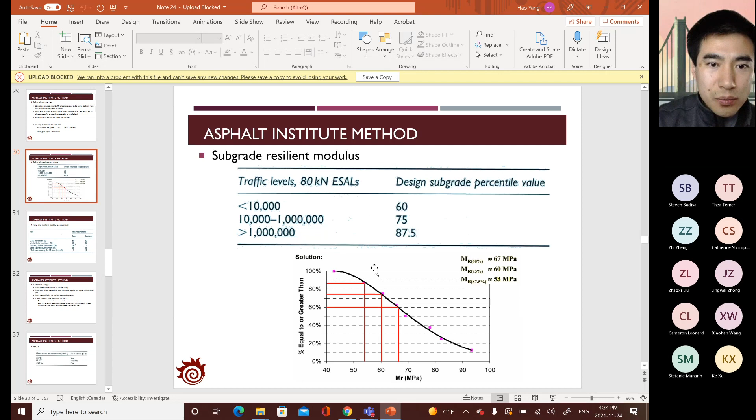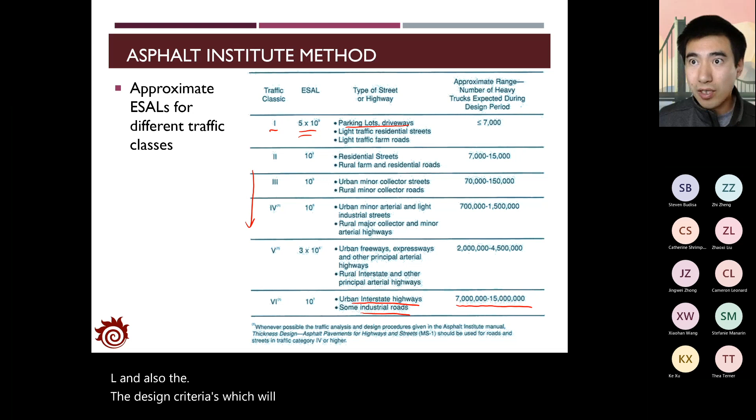With that, I will start lecture today. In the last lecture, we introduced some basic ideas about the AI method. We will go through some fundamental variables we need to use for the AI method, including the estimation of the ESAL, and also the design criteria, which will include fatigue cracking and permanent deformation. Both of these will be applied for us to select the thickness or estimate the thickness for the pavement layers.

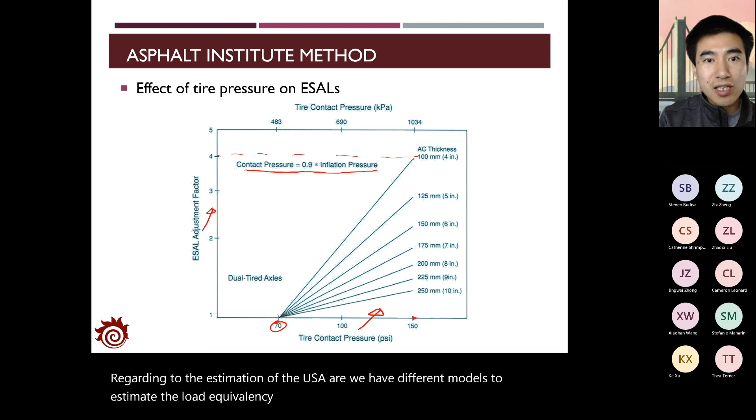Regarding the estimation of the ESAL, we have different models to estimate the load equivalency factor. And if you have the ESAL with different values about the tire pressures, you probably need to do some corrections or adjustments to make sure they fit the standard ESAL values. That's what we introduced in the last lecture.

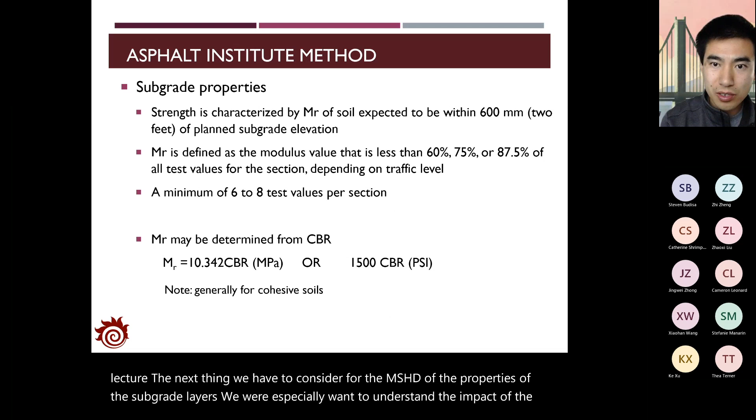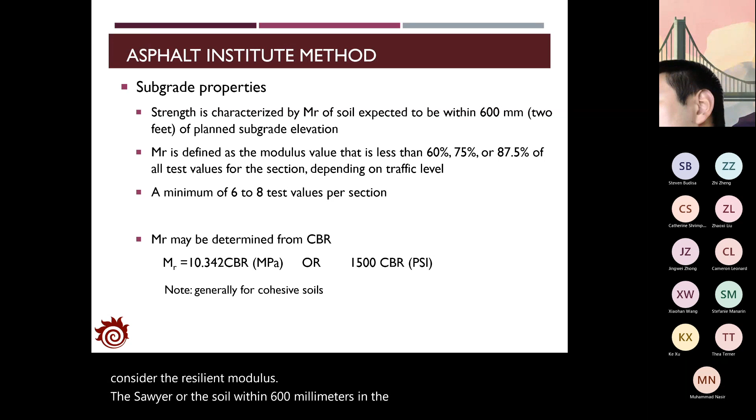The next thing we have to consider for the AI method is the properties of the subgrade layers. We especially want to understand the impact of the resilient modulus of the subgrade on the performance or design of the flexible pavement. Usually we consider the resilient modulus of the subgrade soil within 600 millimeters in the design area, and these are some typical values we're going to use, from empirical analysis.

The resilient modulus is usually defined as the value under certain percentiles. The typical values would be 60%, 75%, and 87.5%. We're going to need to use different percentiles depending on the traffic conditions we have to consider.

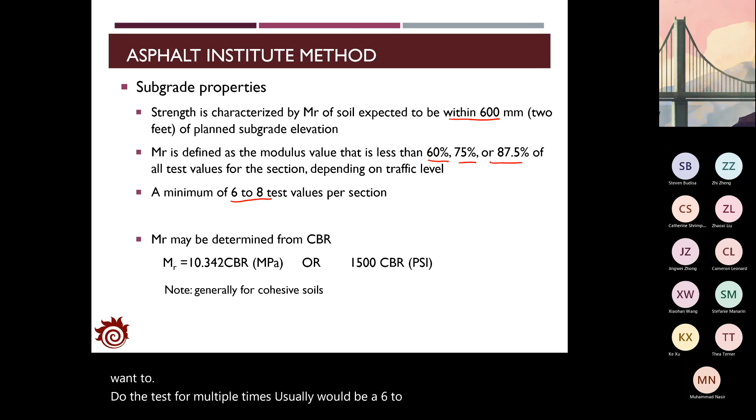Usually to get the resilient modulus, as you know, in reality the resilient modulus for the subgrade soil is not a constant. It's actually changing at different locations with different materials in the pavement. So what we do is conduct the test multiple times, usually 6 to 8 tests for each section, and then we will have 6 to 8 values about the resilient modulus, giving us the distribution about the resilient modulus.

Also, if you don't conduct the MR test, instead you do the CBR test, you can use the empirical relationship between the MR and the CBR to estimate the MR values. So this is what we introduced in the previous lectures about the soil properties.

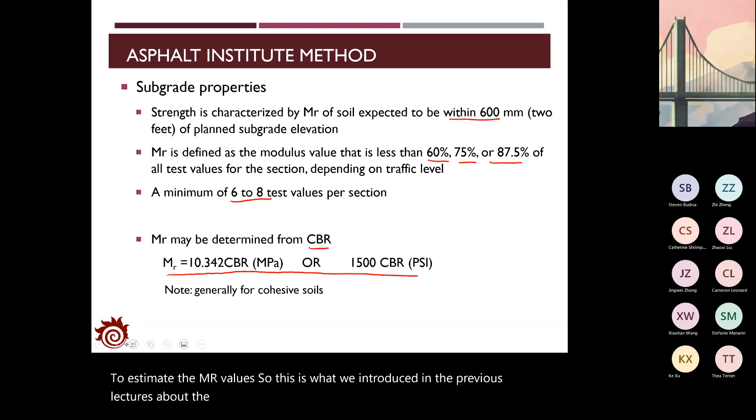Now I'll give you some hints about how to find the values of the resilient modulus for the design of the flexible pavement with the AI method. First, we have to find out what percentage we need to use. Usually, depending on the traffic levels, if the ESAL is below 10,000, we consider the 60th percentile. If it's between 10,000 and 1 million, a very large range, we use the 75th percentile. And if it's higher than 1 million, we have to choose the 87.5th percentile.

The figure below shows the distributions of the resilient modulus and their different values. You can actually see that with a higher percentile on the vertical axis, it corresponds to a higher percentage.

The resilient modulus will be smaller, which means that if you have the higher ESAL, you will assume that the resilient modulus of the subgrade would be smaller, and in that sense you need to design larger thickness for the pavement layers. So that's the basic idea.

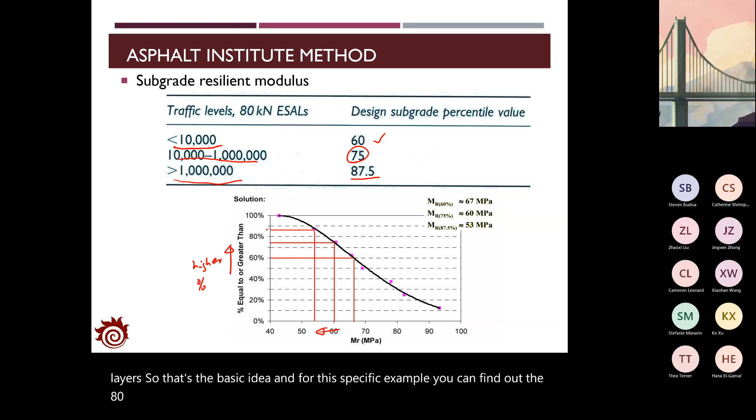For this specific example, you can find out the 87.5 percentile with the value around 53 megapascal. For 75 percentile, that will be around 60 megapascal, and for the 60 percentile, it's 67 megapascal. So that's from one distribution.

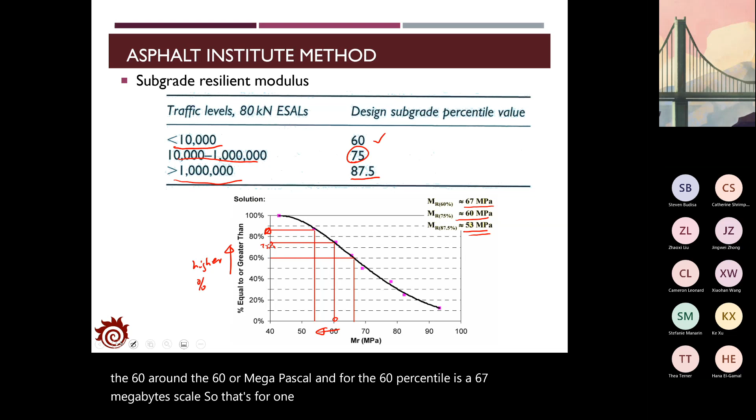As I mentioned previously, if you haven't done the MR test, you can conduct the CBR test to find out the CBR values of all the subgrade soils. Do multiple tests. This is what we can do in the field based on the CBR test, the liquid limit test, and Atterberg limit test and so on.

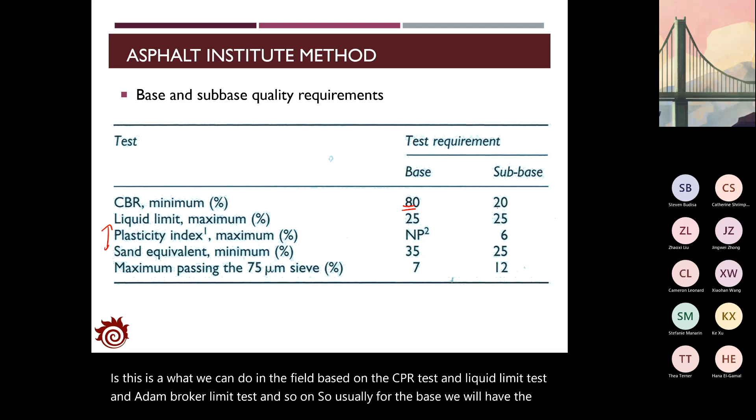So usually for the base, we will have the CBR around 80%, for the subgrade around 20%, the subbase around 20%. So those will be some typical values. And then what we will do is use all this information to design the thickness of the pavement layer based on the AI methods.

For the thickness design, we will need to think about 3 parameters. The first one is the mean annual air temperature. This one is applied to determine whether there's any freeze and frost effect to the pavement.

The second one is the resilient modulus. As I explained previously, you need to determine the distribution of the resilient modulus in the subgrade of the pavement, and then find the correct percentage. And the third one is the ESAL, which would be the traffic load.

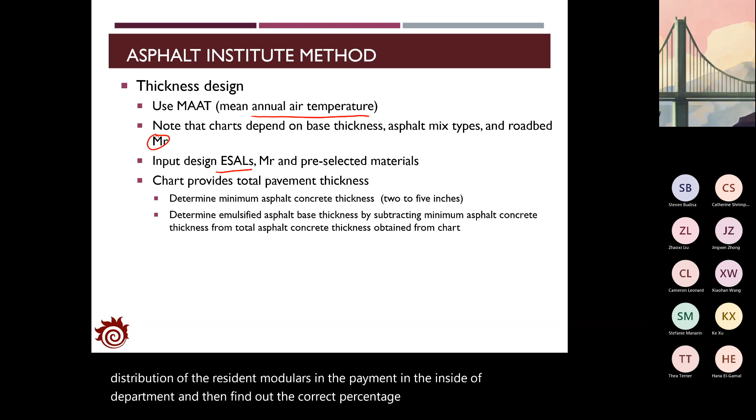So those would be the 3 major variables you need to think about for the thickness design. Once you have determined these values, you can then go to select the chart. There will be some empirical charts from the AI method to determine the thickness of the pavement structures.

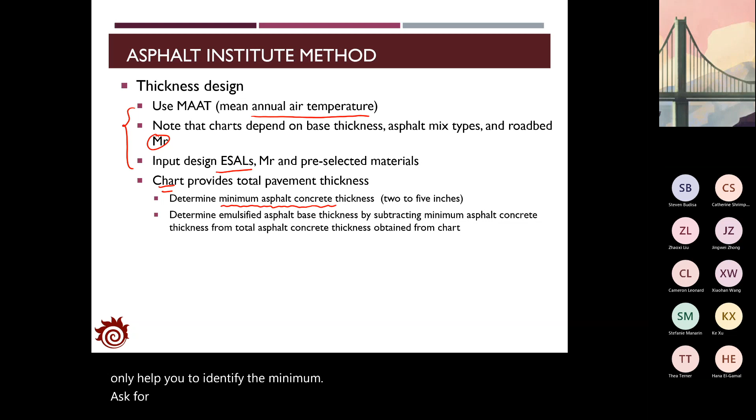So those charts will only help you identify the minimum asphalt concrete thickness. Usually that will be around 2 to 5 inches, depending on the structures of the flexible pavement and also the properties of the subgrade and the traffic load.

It's also able to determine the emulsified asphalt base thickness by subtracting the minimum asphalt concrete thickness from the total asphalt concrete thickness.

So usually what you would observe is like for the flexible pavement, with the AI method, you're gonna just see. So you will have the base layer. Base layer is some particles or crushed stones that are going to be applied above the subgrade.

The AI method, those charts provided by the AI method, will only help you determine the thickness of the asphalt surface layer and the emulsified asphalt concrete layer. So the AI method will only tell you the total thickness of these two layers.

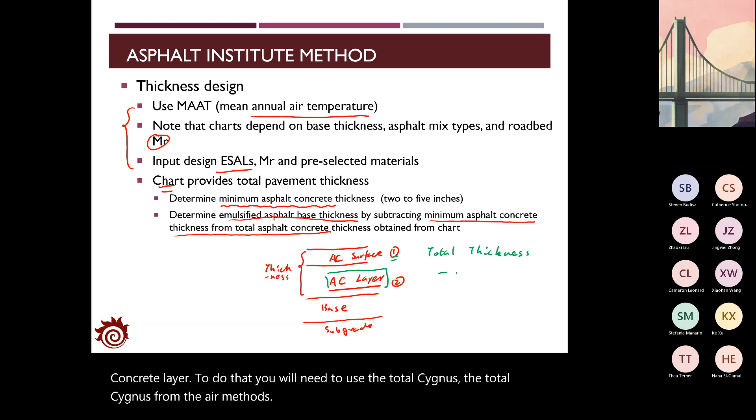Layer 1 and layer 2, both of them are asphalt layers. You also need to determine the emulsified asphalt concrete layer. To do that, you will need to use the total thickness from the AI method minus the minimum thickness of the asphalt surface layer. So that's what you do to find out the thickness of these two layers.

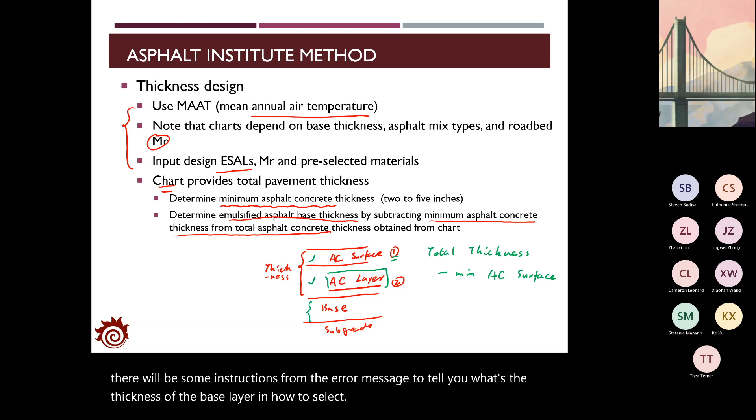And also there will be some instructions from the AI method to tell you what's the thickness of the base layer you have to select. So that's the overall idea from the AI method.

For now, I will give you some more information about these three variables that we're going to use in the AI method. The first one is the mean annual air temperature, MAAT. It depends on the values, and we will categorize the situation into three freeze frost effects.

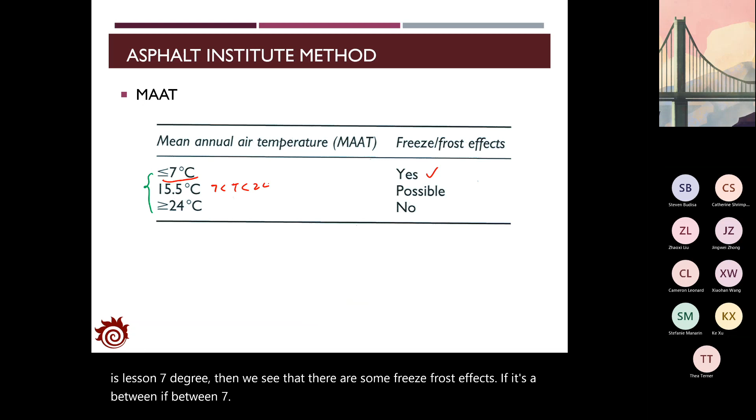If the mean annual air temperature is less than 7 degrees, then we see that there are some freeze frost effects. If it's between 7 and 24 degrees, we see that there are some possible freeze frost effects. If it's higher than 24 degrees, it means that there's no freeze and frost effect. So those would be three different categories you need to specify.

Then based on the freeze frost effect conditions, we will need to choose the right chart from the AI method to determine the thickness. So that's the first variable, the mean annual air temperature.

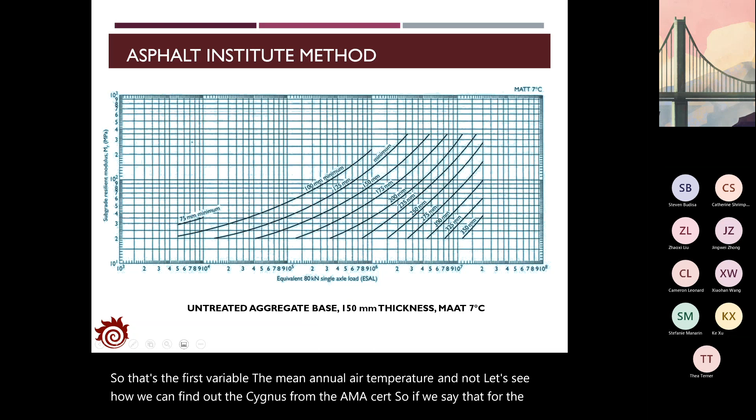Now let's see how we can find out the thickness from the AI method. So if we say that for the case with the freeze frost effect, which means that the MAAT is less than or equal to 7 degrees, in that sense we have three situations. The first one is applied for the deep strength pavement.

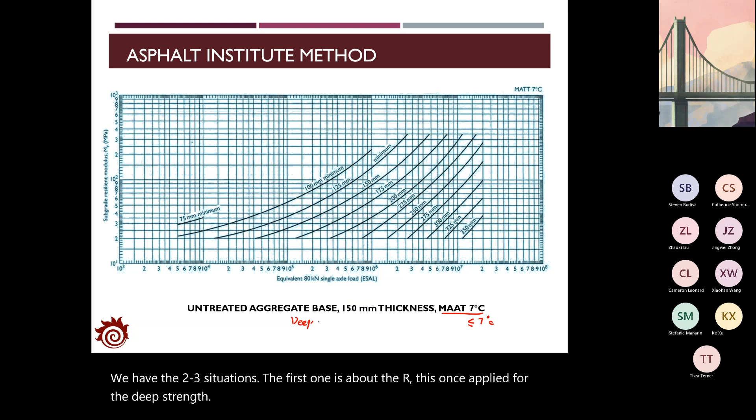If you can still recall the deep strength pavement, you can see that it will include 3 layers. The first one is the asphalt surface layer. The second one is the asphalt base layer. And the third one is the granular subbase layer, granular base layer. And then it has the subgrade, with all layers placed on the subgrade.

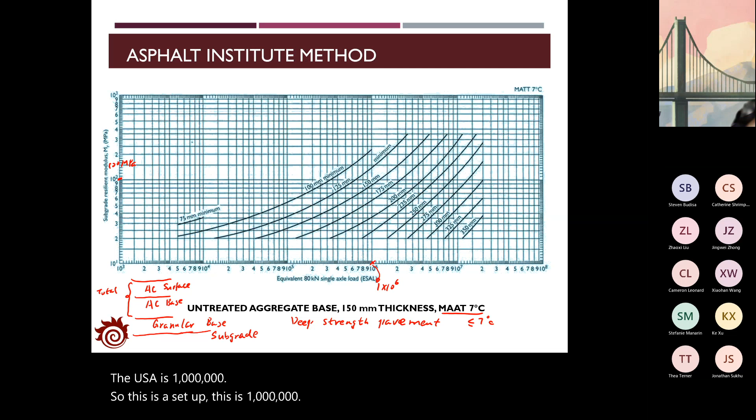So the thickness from this chart will tell you the total thickness of both asphalt layers. What you're going to do is identify the percentile of the MR. Say the MR value you defined is 100 megapascal, and the ESAL is 1 million. Then you can identify the thickness by finding the intersection of these two points.

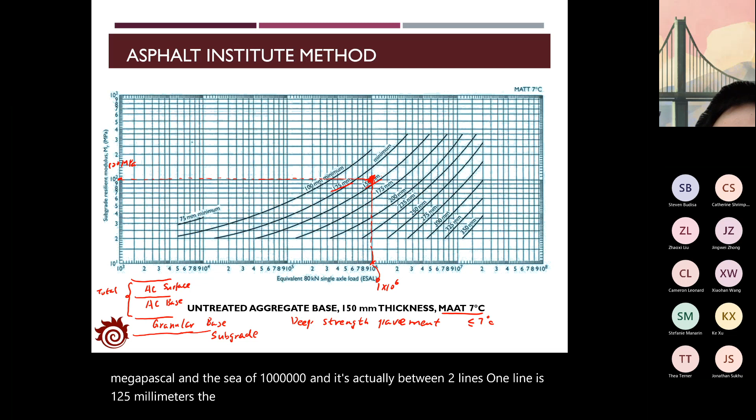Based on these two lines, you can find this point would be the point with the MR value of 100 megapascal and the ESAL of 1 million. It's actually between two lines: one is 125 millimeters, the other is 150 millimeters. So you can use linear interpolation to find the value at this point, which is probably around 140 millimeters.

So this 140 will be the total thickness of both asphalt layers, for the deep strength pavement. This chart is only applied for the deep strength pavement with the thickness of the granular base of 150 millimeters. So this is the first chart.

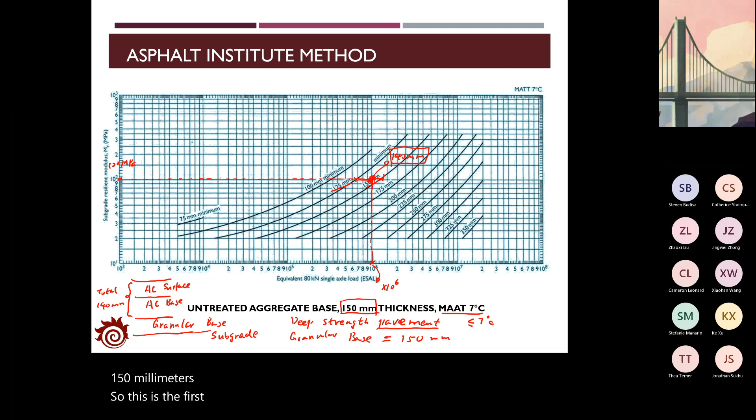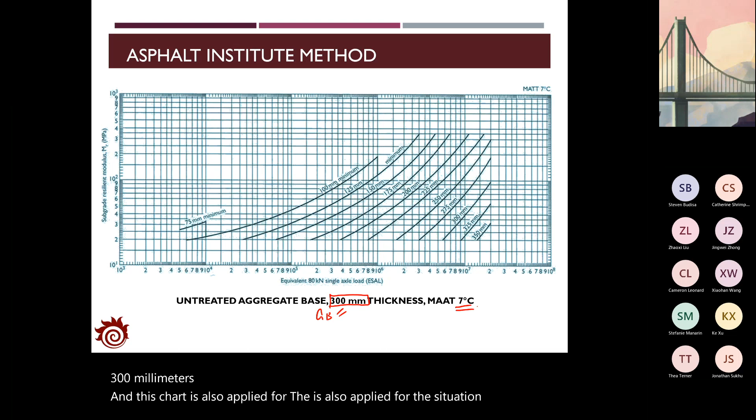We also have another situation. The AI method provided another chart which applies for the granular base with thickness around 300 millimeters, and this chart also applies for the situation with freeze and frost effect, so the MAAT temperature is less than 7 degrees.

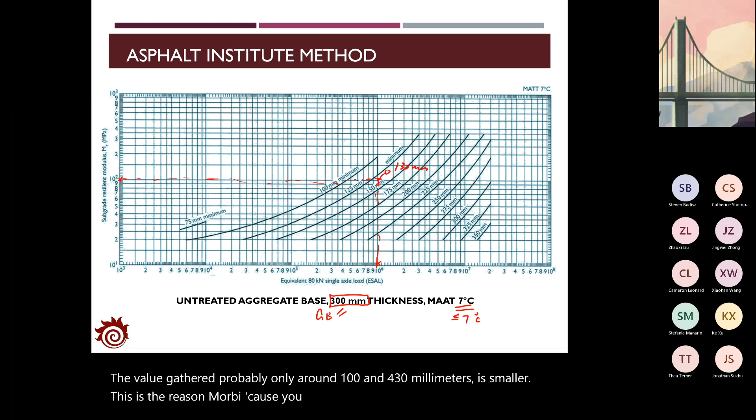If we take the same example, MR is 100 and ESAL is 1 million, you'll find the value you get is probably only around 130 millimeters. It's smaller, which is reasonable because the granular base thickness is larger, meaning you have stronger support from the lower layers, so for the asphalt layers you don't need very large thickness.

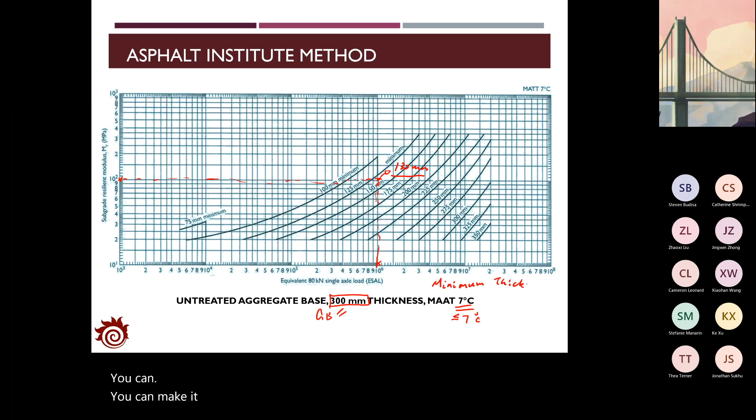Again, I should mention that all these thickness values you calculate here are the minimum thickness. In your design you can make it larger depending on the specific requirement of the project. So that's for the deep strength pavement.

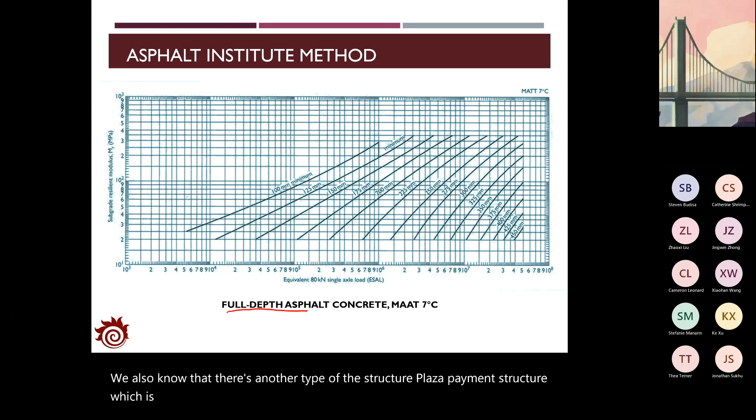We also know there's another type of flexible pavement structure called the full depth structure. In the full depth structure, we will not have any granular base layer. Instead, we only have two layers: the asphalt surface layer and the asphalt concrete base layer, placed directly on top of the subgrade. This is called the full depth flexible pavement.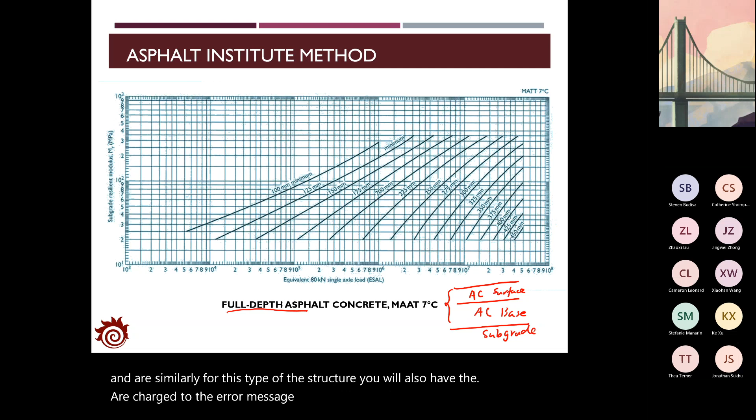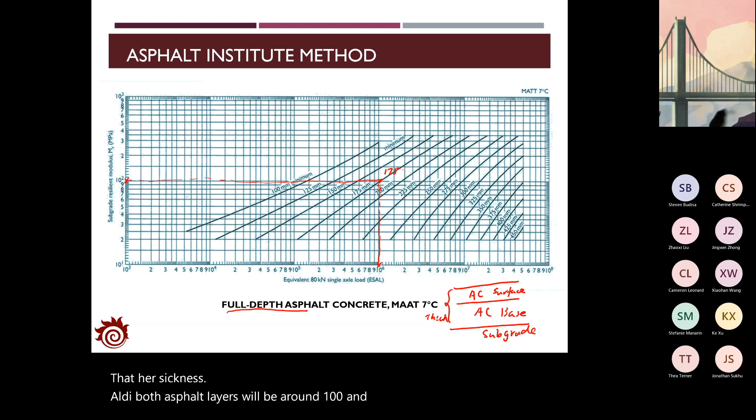For this type of structure, you will also have a chart. The AI method provides a chart to determine the thickness of both asphalt layers. Taking the same example, ESAL of 1 million and MR of 100, you can find the total thickness of both asphalt layers will be around 175 millimeters, which is larger than the two deep strength pavement cases.

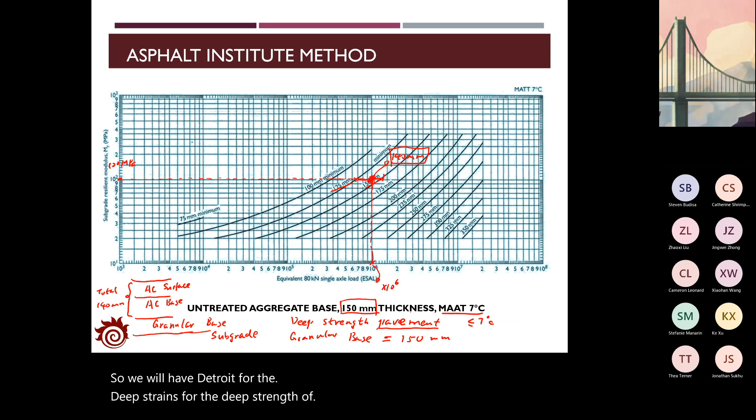So that's for the design of the flexible pavement with average annual air temperature less than 7 degrees. We have the chart for the deep strength pavement with granular base thickness of 150 millimeters, and another chart for granular base thickness around 300 millimeters.

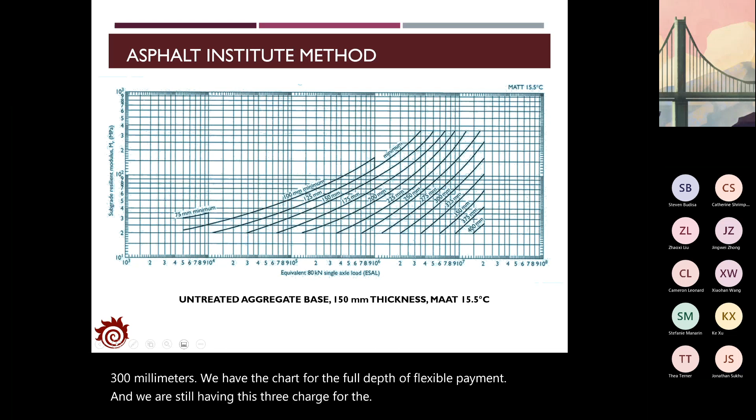We have the chart for the full depth flexible pavement, and we also have three charts for the situation with possible freeze frost effect, with MAAT around 15.5 degrees, indicating the temperature is between 7 and 24 degrees. It's the same approach.

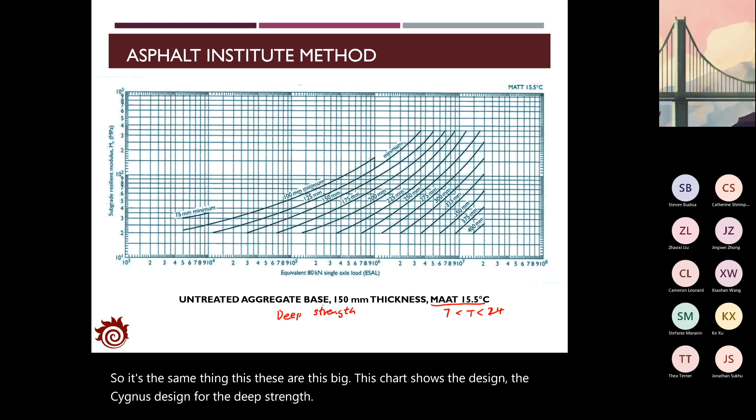This chart shows the thickness design for the deep strength pavement with the granular base of 150 millimeters, and this chart shows the deep strength pavement with granular base around 300 millimeters, with a possible freeze frost effect. We also have charts showing the thickness for the full depth flexible pavement.

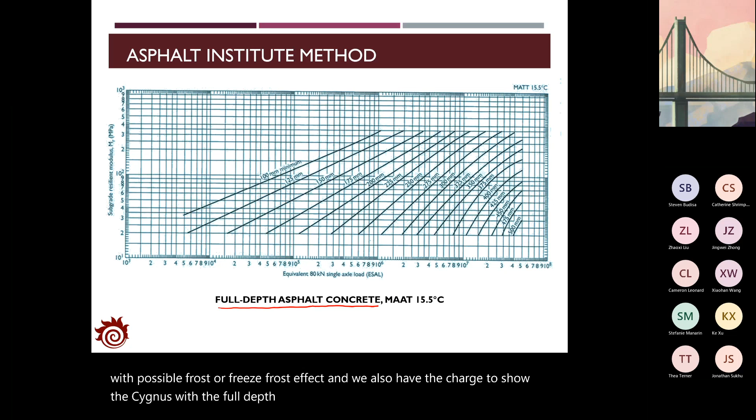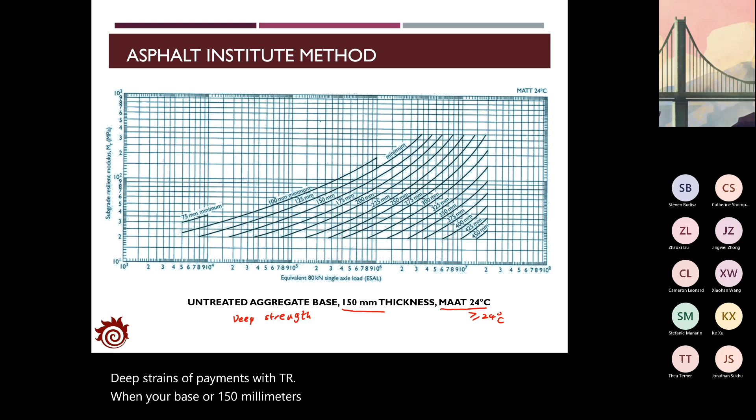That's for the second case with possible freeze frost effect. For the third situation without any freeze frost effect, meaning the temperature is higher than 24 degrees, we also have three charts. The first one is for the deep strength pavement with granular base of 150 millimeters. Similarly, you can use the MR values and the ESAL to find the thickness of the asphalt layers.

The second one shows the deep strength structure with the 300 millimeter granular base, and the last one shows the full depth asphalt pavement without any freeze frost effect.

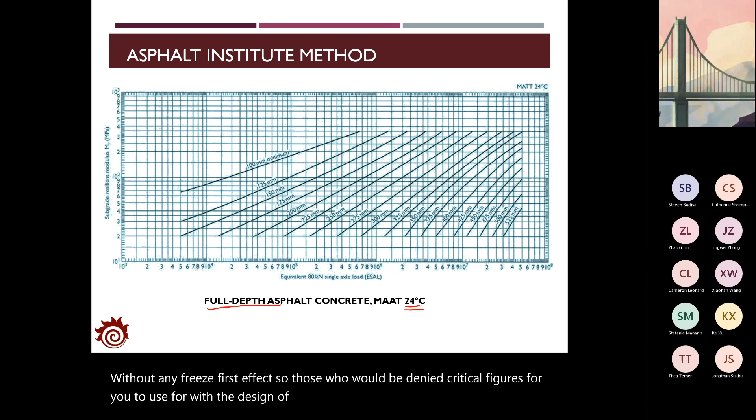So those would be the 9 critical figures for you to use with the design of the AI method, and there will also be some typical recommendations from the thickness design in the AI method.

First, we will always place a minimum of 150 millimeters base course, the granular base course, over the low quality subbase, especially when the quality of the subgrade is very poor, then you should place a 150 millimeter granular base layer there.

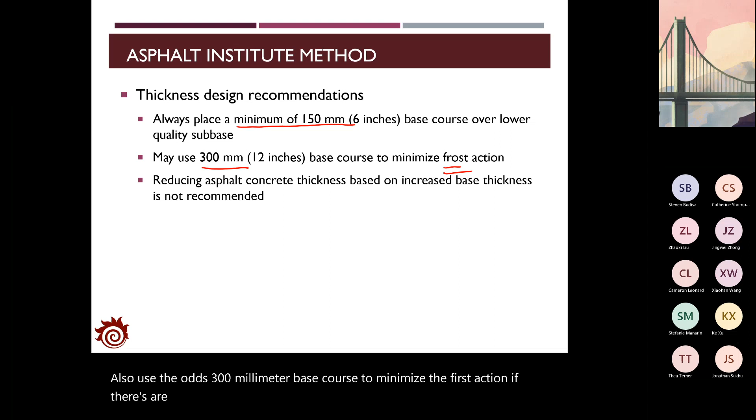You can also use the 300 millimeter base course to minimize frost action. If there's a severe frost action, you should apply a 300 millimeter granular base.

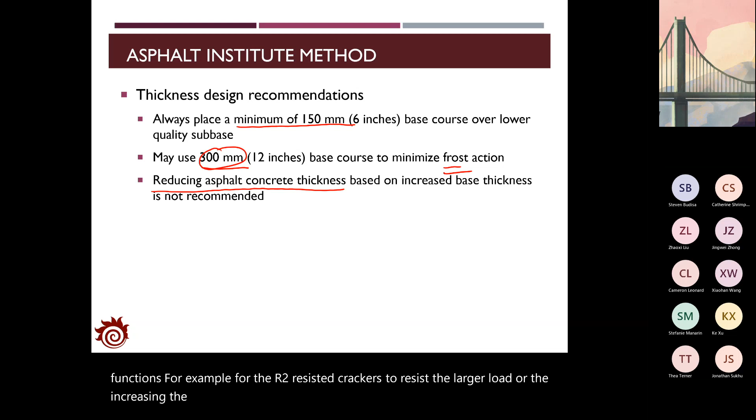Another thing is, for the design, it's not recommended to reduce the asphalt concrete thickness by increasing the thickness of the granular base. This is not recommended, because the asphalt layer also has different functions, for example, to resist cracking and to resist larger loads. Increasing the thickness of the granular base layer while reducing the asphalt concrete thickness is not a recommended solution for pavement design.

So that's some recommendations from the AI method, and we also have some minimum thickness recommendations for the asphalt wearing course, which would be the asphalt surface layer.

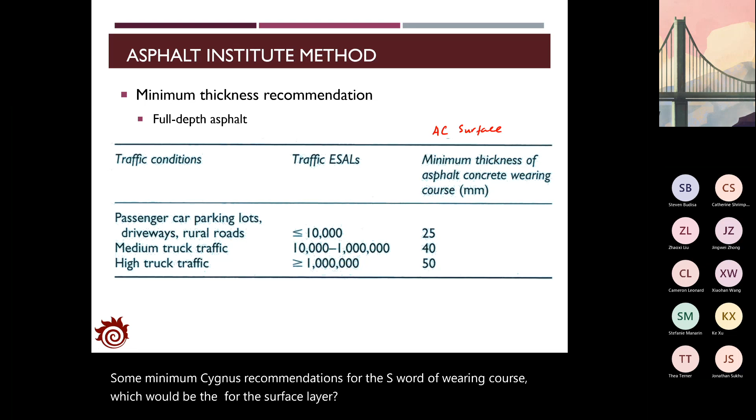Usually for a parking lot, driveway, or rural road with ESAL less than 10,000, the minimum thickness for the asphalt surface layer should be around 25 millimeters. For a road with medium truck traffic between 10,000 to 1 million, the minimum thickness should be 40 millimeters. For a very busy road with a lot of truck traffic, with ESAL higher than 1 million, the minimum thickness should be around 50 millimeters.

So that would be some typical recommendations for the full depth asphalt pavement.

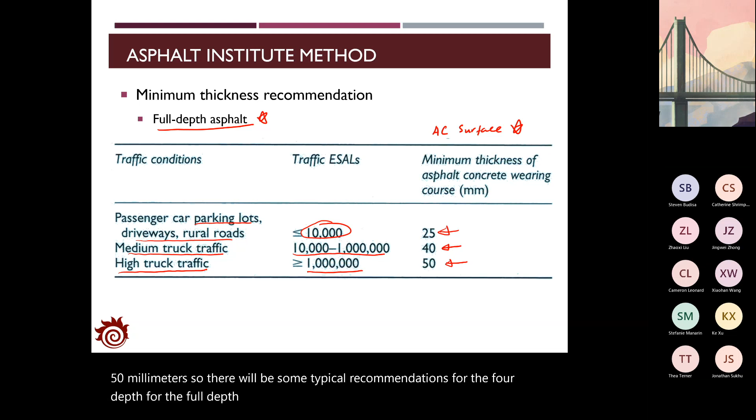For the deep strength structure, we have different recommendations for the minimum thickness of the asphalt concrete layer. This would be the asphalt surface layer plus the asphalt concrete base layer, so that would be the summation of these two.

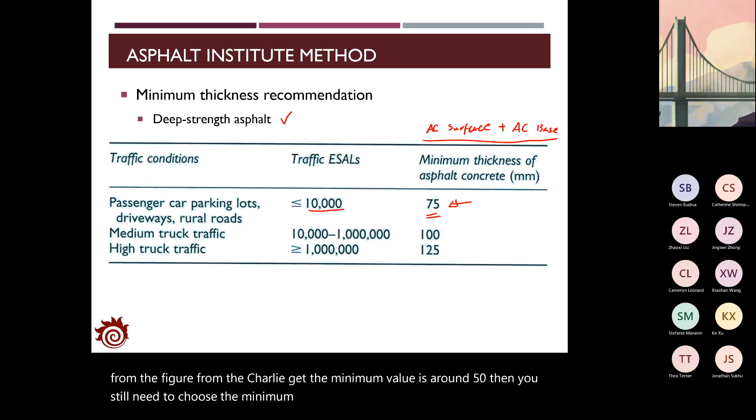For ESAL less than 10,000, the minimum should be 75, and you have to combine this with the value you obtained from the figure. Both minimum conditions should be satisfied. If from the chart you get a minimum value around 50, you still need to choose the minimum value as 75, because this is the recommended value for the deep strength pavement based on empirical data.

If it's in medium traffic, the minimum value should be 100. If it's in heavy traffic, it should be around 125.

There will also be some simplified AI design approaches. This is actually only applied for parking lots, driveways, and unloading areas where you don't have a lot of analysis about the traffic or the frequency of the flows.

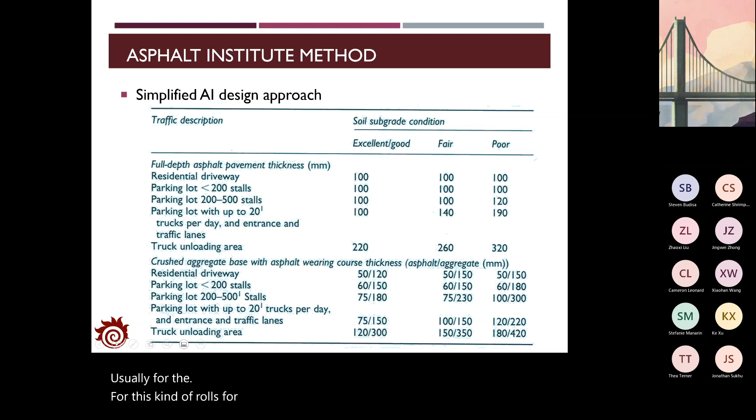Usually for this kind of roads and pavements, you need to think about the number of trucks that will be there, will be parked there, and also the quality of the subgrade soils: excellent quality, fair quality, or poor quality.

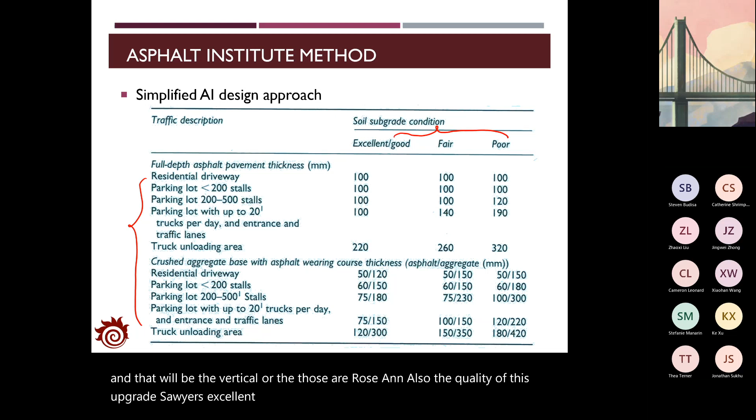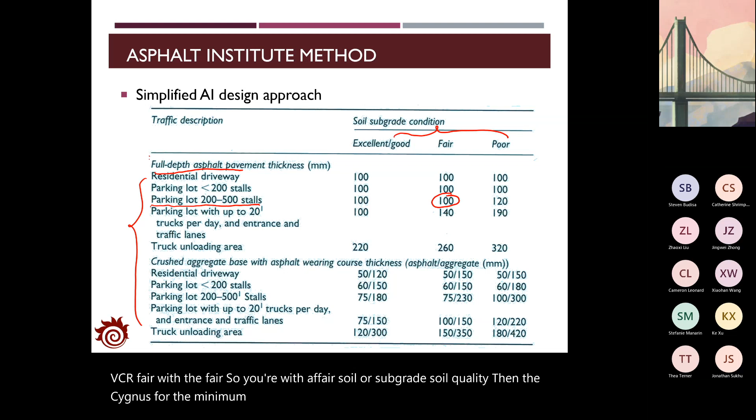For example, if we consider a parking lot with 200 to 500 stalls, with fair subgrade soil quality, then the minimum thickness for the full depth asphalt pavement should be around 100 millimeters.

And for the deep strength structure, for this part, you will also have minimum values for the asphalt layer and the aggregate base layer, which would be the granular base layer.

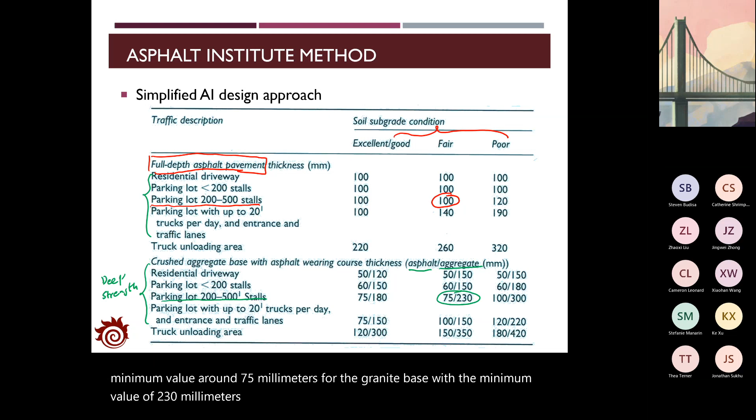So usually, for example, for the same parking lot with 200 to 500 stalls and fair quality subgrade, you will have the asphalt layer with a minimum value around 75 millimeters, and the granular base with a minimum value of 230 millimeters. So these would be some recommendations from the AI method for the specific pavement, the parking lot, and the truck loading/unloading area.

Now let's go see one example to see how we're going to use the AI method to complete the design of the pavement.

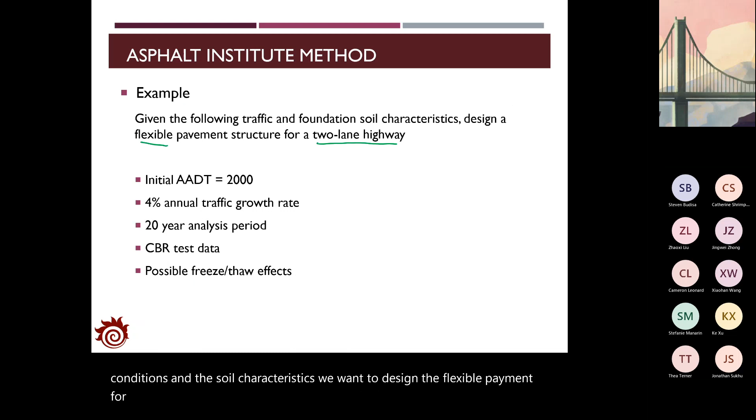First of all, assuming that we are provided with the following traffic conditions and soil characteristics, we want to design the flexible pavement for a two-lane highway. The initial average annual daily traffic is set as 2,000, and we set the annual traffic growth rate as 4%. The design period is 20 years. We also provide the CBR test data, and we say that there will be some possible freeze-thaw effect.

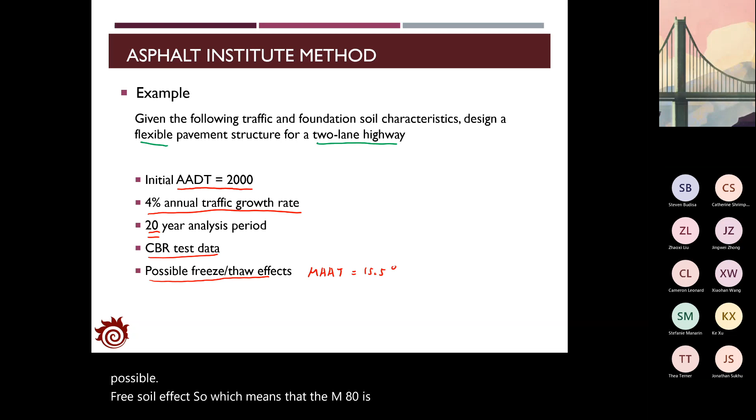So the MAAT is set as 15.5 degrees. Now we want to find out the thickness of the pavement for asphalt, the flexible pavements.

First we want to do some analysis about the ESAL, and there will be some information provided for you to analyze the traffic conditions.

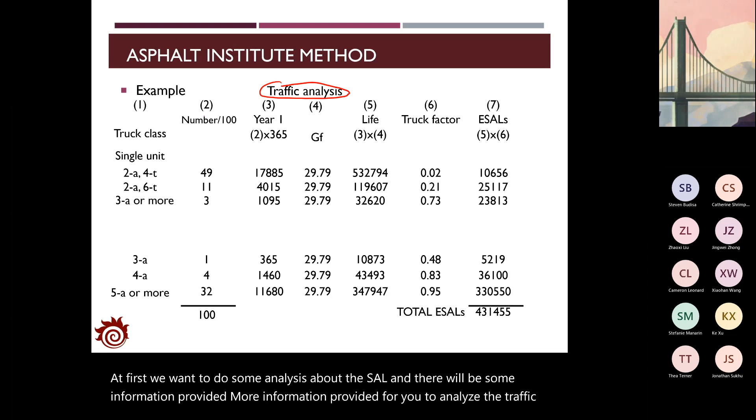For the class of traffic, we have groups 1, 2, 3, 4, 5, and 6 - six different groups of trucks, including single unit trucks and multiple unit trucks. The second column shows the distribution, or the percentage, of each group.

For the 2-axle with 4 tires, the number is 49. For the 2-axle with 6 tires, the number is 11 - that means 11% of them would be the 2-axle 6 tires. You can get the percentage of the other groups similarly.

From this we can calculate the number of trucks for every year. Say every day the value is 49, then every year that will be 49 times 365. That's how many trucks are in group 1. You can also find values for the other groups.

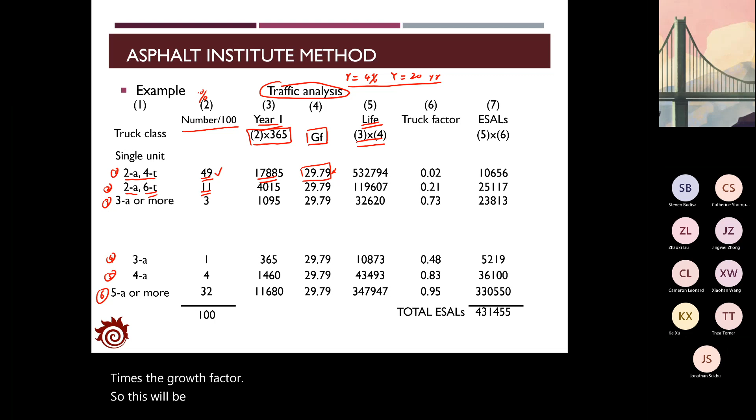For the design period, in the 5th column, you can find the number of vehicles in the design period for each group. That's the number of trucks observed in each group every year, times the growth factor. This gives you the value for the lifetime number of trucks in each group.

We also have the truck factors for each group - group 1 is 0.02, group 2 is 0.2, and so on. The ESAL for each group will be the truck factor times the lifetime number of trucks, so with that you can find the ESAL for each group.

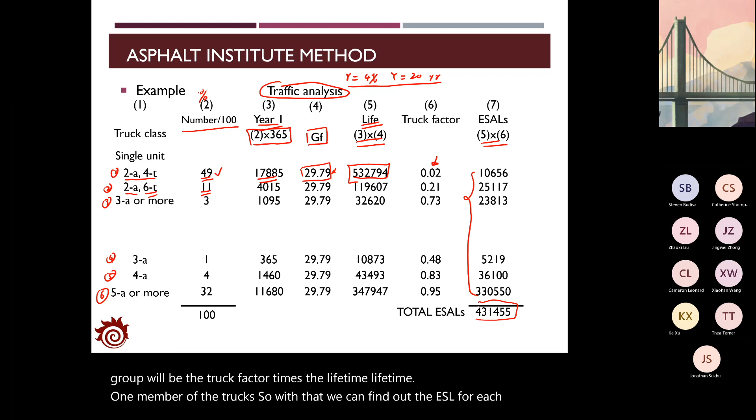If you summarize them, you get the total number of ESAL for all the groups - based on 100 vehicles. So this is the ESAL. The next thing we want to find out is the MR values for the subgrade.

We will conduct 8 experiments to test the MR values, and this is what we find from the field. To find out the distribution of the MR values, what do you do?

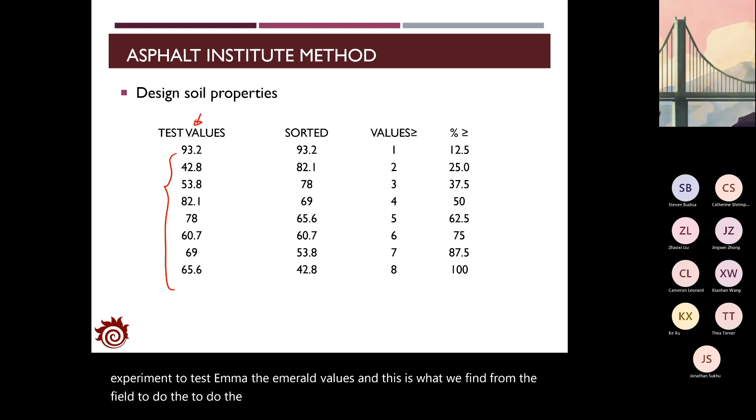First you need to sort these observed values from high to low, then rank them from the first one to the last. So with 8 values, they are ranked 1, 2, 3, 4, 5 for each observation in the field. The next thing is calculating the percentage.

The percentage is calculated directly as the rank value divided by the total number of observations. This gives you the first one as 1/8, the second as 2/8, and so on, with the last one being 8/8, which is 100%.

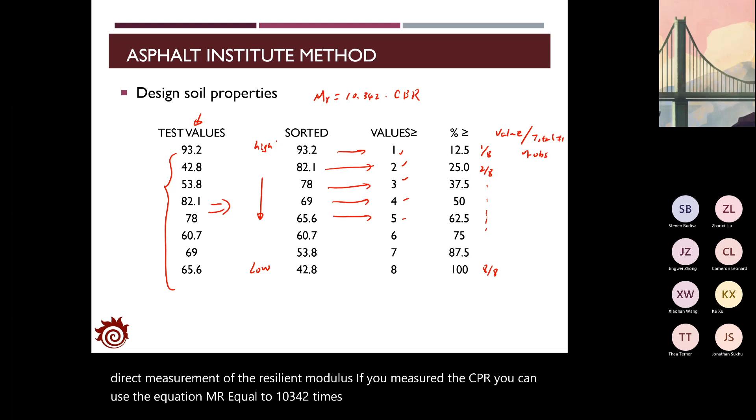This is the case for direct measurement of the resilient modulus. If you measured the CBR instead, you can use the equation MR equals 10.342 times CBR to get the MR values, then follow the same procedure to find the distribution.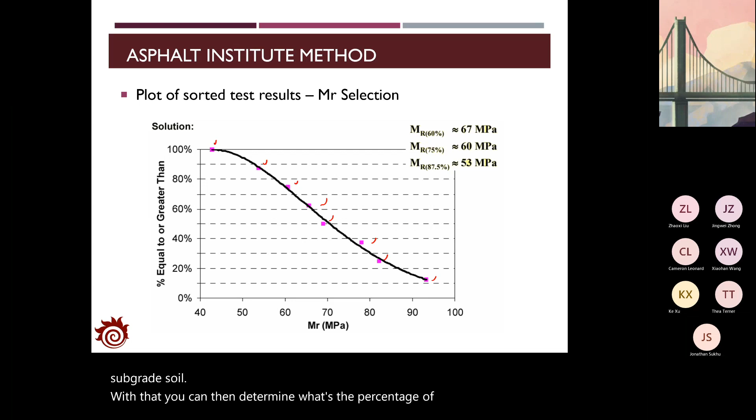With that, you can then determine what percentile of the soil MR values we should select. First we go check all the values we have obtained previously.

We estimate the ESAL as 431,455 for the design period. This is in the range of 10,000 to a million, so we decide to choose the 75th percentile. You can check the table I showed previously - this percentile is applied to find out the resilient modulus, giving you the value of 60 megapascals.

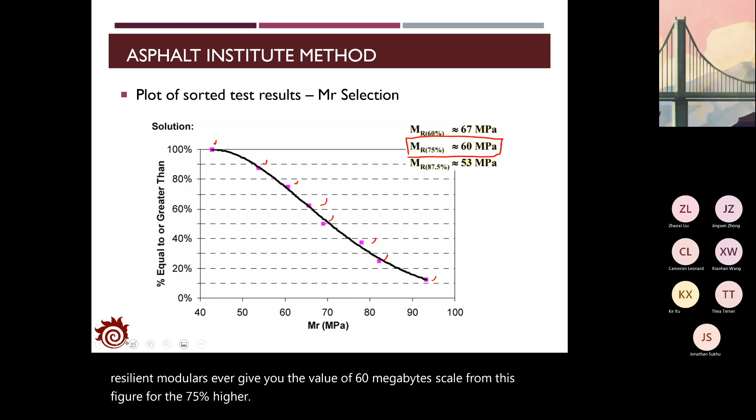From this figure, for the 75th percentile, that's 60 megapascals. And then we can go check the MAAT.

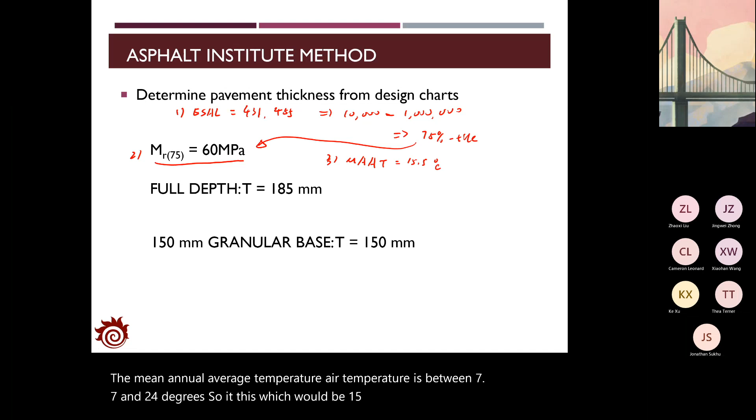The mean annual air temperature is between 7 and 24 degrees, so we'll use 15.5 degrees. With this information, we can check the figures to find the pavement thickness. It could be full depth asphalt pavement or deep strength asphalt pavement. For the full depth, we find the value as 185 millimeters.

Let me show you how to get it. We have the ESAL, which is around 430,000 to 431,455, so that gives us a point here. For the MR value, we get 60 megapascal. We find the point in the vertical axis, and then determine the point from these two values. This red dot is the point we obtain for the thickness with respect to the full depth asphalt pavement. Remember, when you select the chart, choose the one with the MAAT value around 15.5 degrees. By using linear interpolation between these two lines, you get the thickness around 185 millimeters.

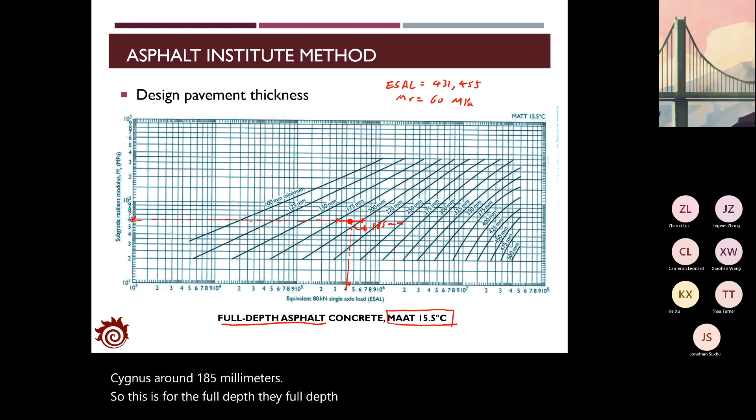So this is for the full depth pavement. Now if we consider a different pavement structure, the deep strength, say we're going to consider deep strength with a granular base of 150 millimeters. Here we only have the possible freeze frost effect. It's not necessary to choose the 300 millimeter granular base layer, but you can do that. It depends on your preferences.

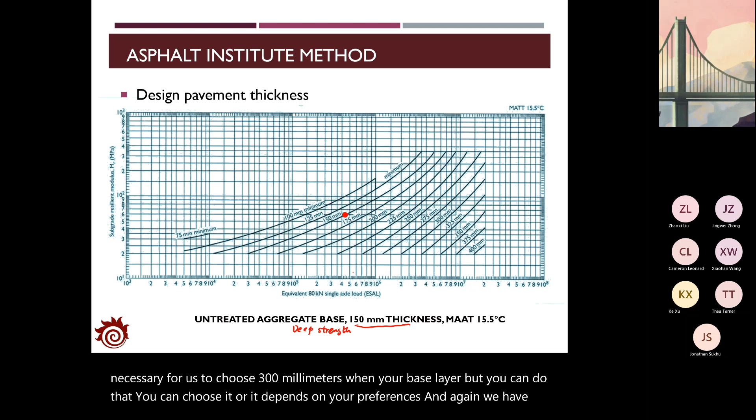Again we have the ESAL around 430,000, and the MR value around 60 megapascal. With that, you'll have the intersection, the point determined by these two values. That gives you a value around 100; it actually falls on the line of 150. So we get the minimum thickness of the asphalt layer for the deep strength pavement around 150 millimeters.

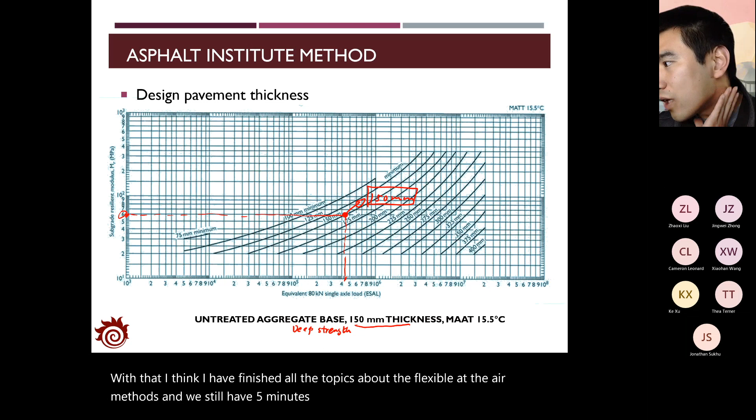So that's for the deep strength pavement. With that, I think I've finished all the topics about the flexible AI method, and we still have 5 minutes left, so I want to reserve this time for your questions, and also give you another quick practice.

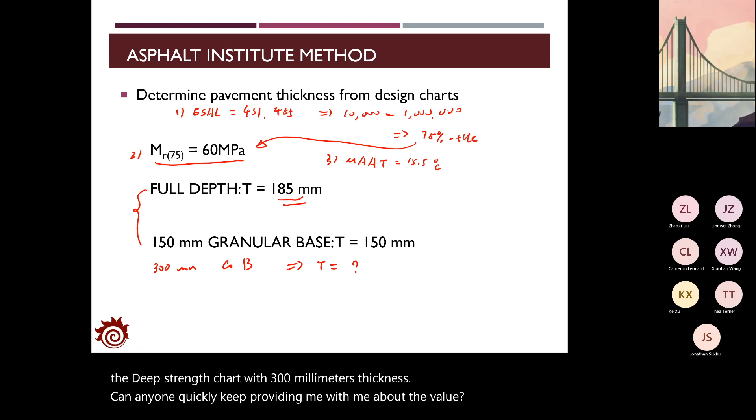So if I ask you to check the case with a 300 millimeter granular base, what's the thickness of this design from the AI method? Can anyone give me a value? You need to go back to check the chart for the MAAT of 15.5 degrees, and for the deep strength chart with 300 millimeter thickness. Can anyone quickly provide me with the value? Any ideas about it?

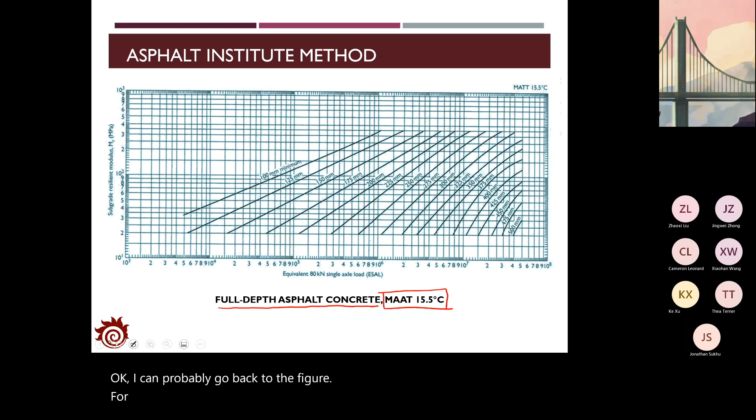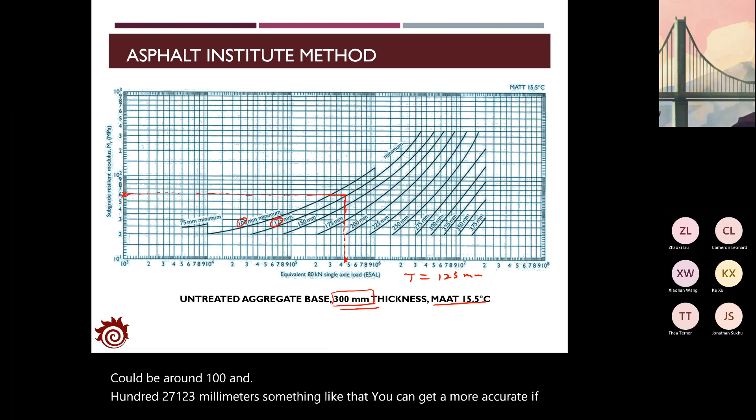Okay, I can go back to the figure for the specific condition with the MAAT around 15.5 degrees, the thickness of 300 millimeters. So this is the figure you're going to use. We also know the ESAL is around 430,000, so that gives us a point here, and the resilient modulus is 60 megapascal. By choosing these two points, you determine the point in this chart, which gives a value between 100 and 125 millimeters, pretty close to 125. So you can find the thickness could be around 120, say 123 millimeters, something like that. You can get more accuracy using the actual scale. That's how you get the thickness of the flexible pavement with the AI method.